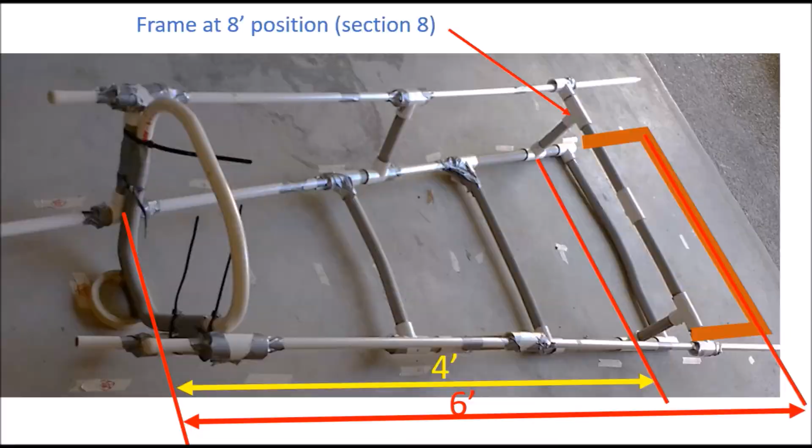Let's take a look at how to make this section. Assume that this will be gone, this will be gone, and the main piece is just this one, all the way here, which is roughly about from here to here, about 4 feet. And then the tail section, another 2 feet. Right at 8 feet, from here to here is 9.5 inches, and then there's 1.5 inch.

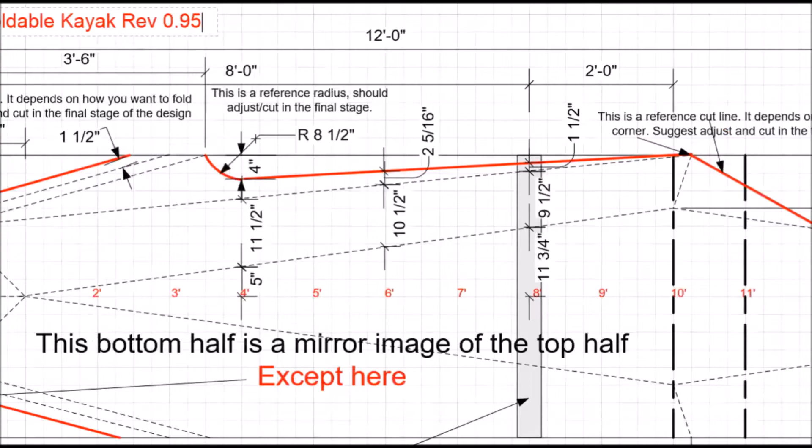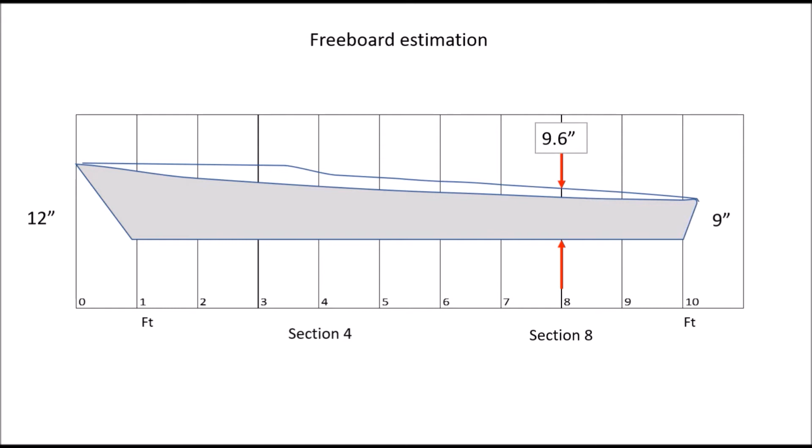Let's jump back and look at this one. Assume that this is the bottom of the boat. If I do a 9.5, I draw an arc, and then I do 1.5 here. This is what the intersection is. It will give me 9.6 inch freeboard. This is why I'm trying to get to 9.6. This is 9.6, and then this is 9.6 freeboard. In order to maintain that, I can overlay the PVC tubing around here to create this frame at section 8.

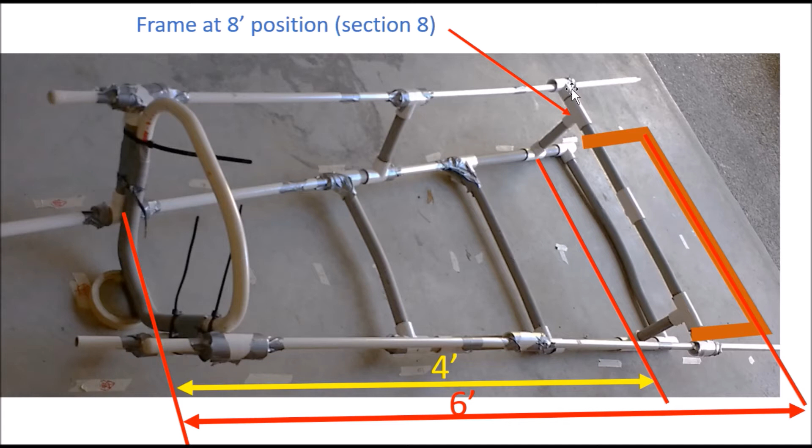I would suggest using this one, and the one I've shown here is the one I got from Home Depot, which is only a T. Having this one will make things much simpler because it has all the slots I need to create a frame. The reason I create this more complicated frame is because I want to convert this particular boat into a sailboat later on. Therefore, I have added a lot of extra stuff.

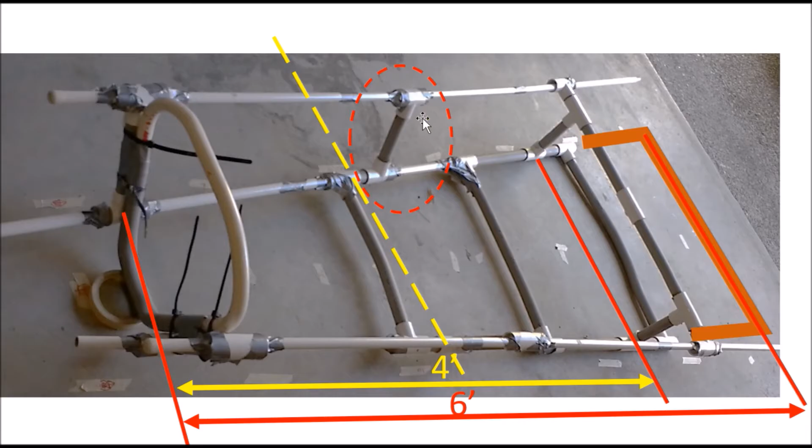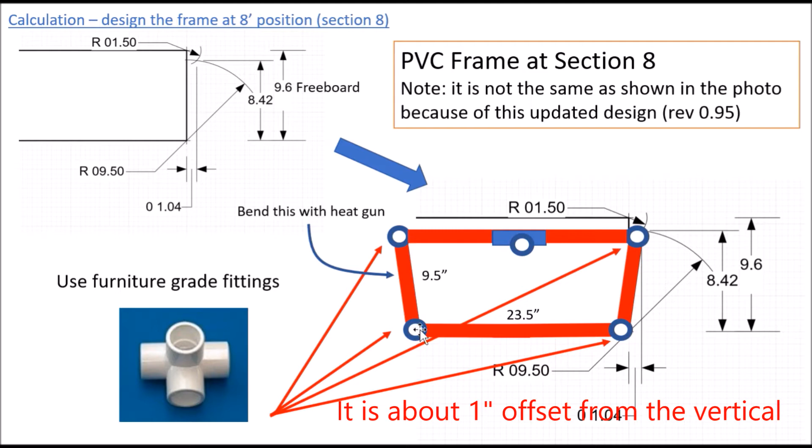With this frame, if you look at it, it's not really vertical, but coming out here, all the pipe will be vertical. So you can use a heat gun and do a minor bending to create this angle. It actually is very easy to do. This is my first initial design, and after I put things together, you can see the alignment isn't correct at this point, right here, and then here I use a heat gun, apply heat around here and bend it, and it is fairly easy to do.

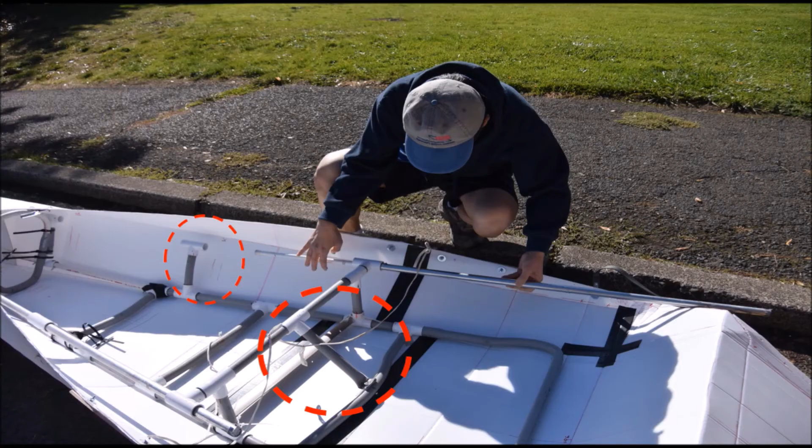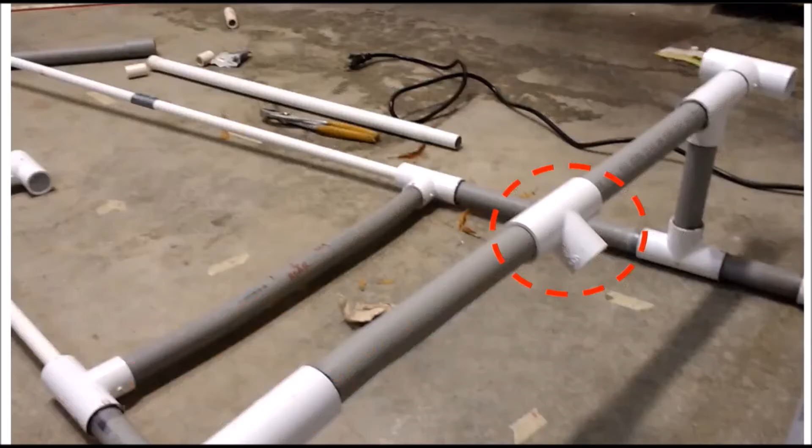If you look at here, I have another T-joint here. The reason I have another T-joint here is because I want to add another piece pushing downward to the frame. I want more support at this point, because I'm going to put the seat rest against this particular member.

And the T-joint here, I didn't glue it to the pipe because I need a little bit of freedom, allowing me to rotate it so that I can adjust this particular pipe, and I screw the other end onto the cross member here.

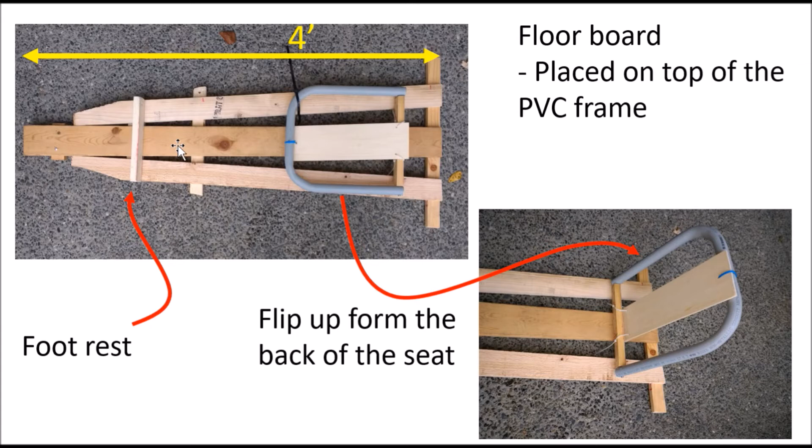I use a few pieces of wood to create this floor for the boat so I can step on it. And I also create the back of the seat, and it can collapse and fold downward, or you can push it up. And I also use another piece of wood to create a footrest. When we paddle, we can step on it and push against it with our feet.

This is the final design of the frame. If your goal is not to support the future sailboat design, which I don't have a recipe for at this point, I would suggest you create the frame this way, and then add the floor-board design on top to provide better support to the frame.

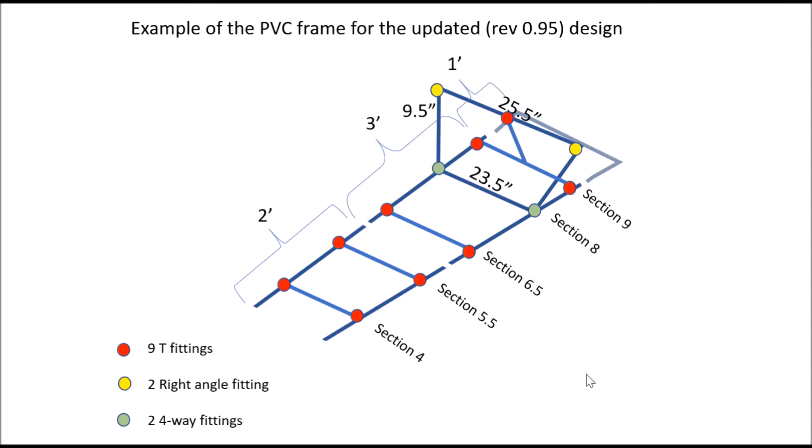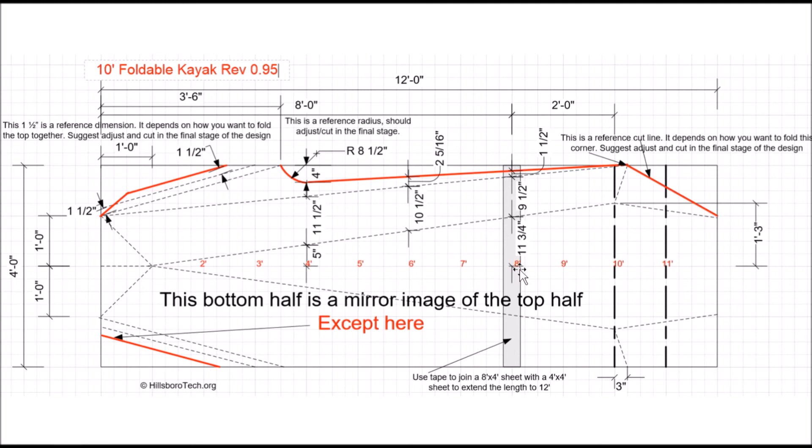I used 2 sheets of Coroplast. The first sheet is a 4x8. The other one is a 4x4. Here I use the Gorilla tape and tape both sheets together. I have 3 layers on top, 3 layers at the bottom. Because I use the tape and I don't want stress to be applied to the tape, I put a piece of wood at the edge to relieve the stress or pull between the 2 sections of the Coroplast. And you can use a shorter piece.

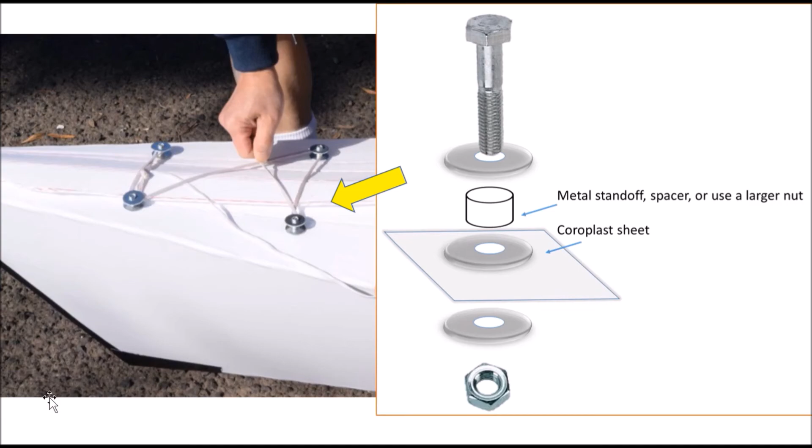And at the front of the boat, I just create some kind of a spool arrangement. As you can see how I make it, it's very simple. And it worked out very well. And I also suggest using 2 independent ropes, so that in case one breaks, you still have another one holding them together. In some designs, they use these plastic buckles with straps. Next design, I will try to do that too.

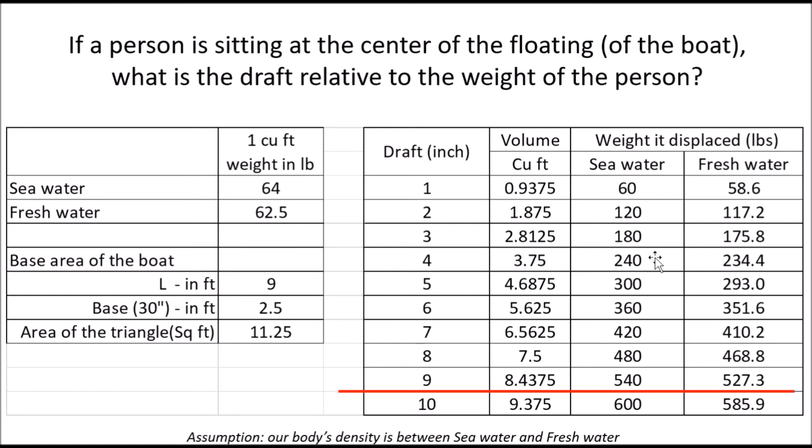How much can this boat support at the length of 10 feet? Now, assume we are sitting right at the center of the flotation at the segment between 7 and 8. If I want the draft to be 4 inches, then it can handle 240 pounds total. But when you look at my picture here, I'm probably at around 8.5 feet from the tip. Therefore, you see the draft in the front is maybe only 1 inch. At the back, you are talking about 4 or 5 inches. And my total weight on the boat together with me is probably around 170 pounds, with the paddle too.

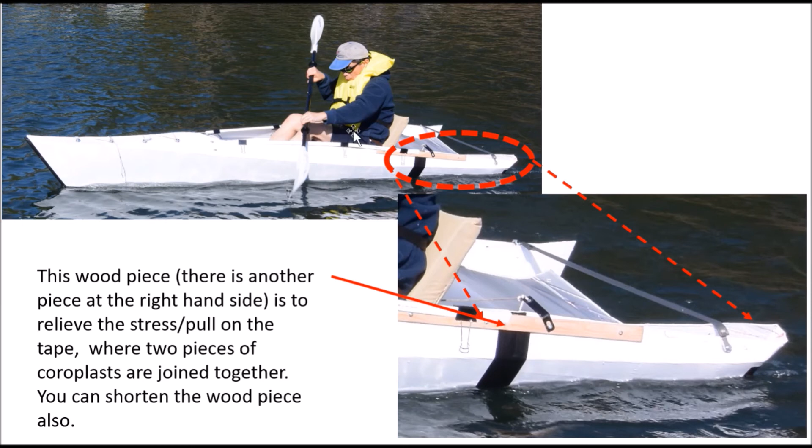I found it's very easy to create a fold line. I use the heat gun to warm up the surface, and then I just use the handle part of the wrench to create a fold line. I put a ruler there to guide me too. You have to make sure that the edge of this wrench is smooth, otherwise it will cut into the Coroplast.

In some of the drawings, you see me having these brackets here, which I put at section 4. Later on, I will use them for my sailboat to support my poles for the sail. I use a PVC pipe and a 1/2 inch PVC pipe, just heat up the front here and then insert the 1/2 inch smaller PVC pipe into the bigger one. It works out very well. There are many places online which sell furniture grade fittings. Furniture grade is supposed to be stronger than the ones we get from Home Depot, either for conduit or for irrigation piping.

During my water test, the boat was flipped over because of a very strong wake from a nearby tugboat. And the boat stayed afloat, but it was right at this level. Therefore, I suggest we put some more flotation around the boat, around the gunwale here, so that this top piece will stay above the water, and then you can get a bucket to get the water out of the boat. Another option is you can get some empty milk jugs and stuff them into this portion of the boat, or maybe put another one in the front. It should be able to create sufficient flotation to keep the opening above the water line so that you can clear the water.

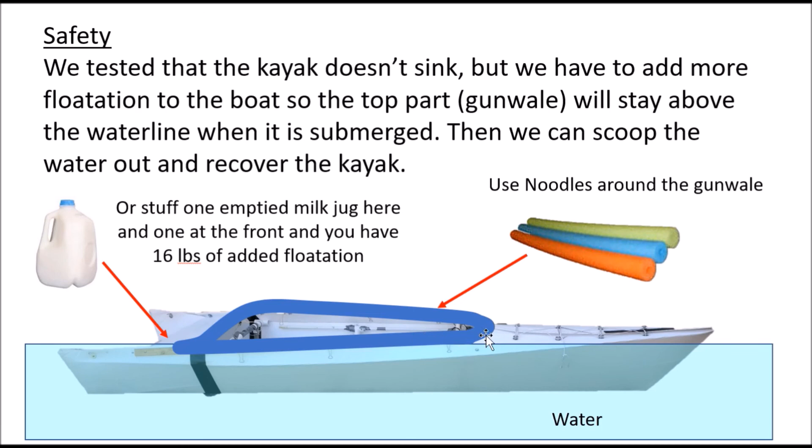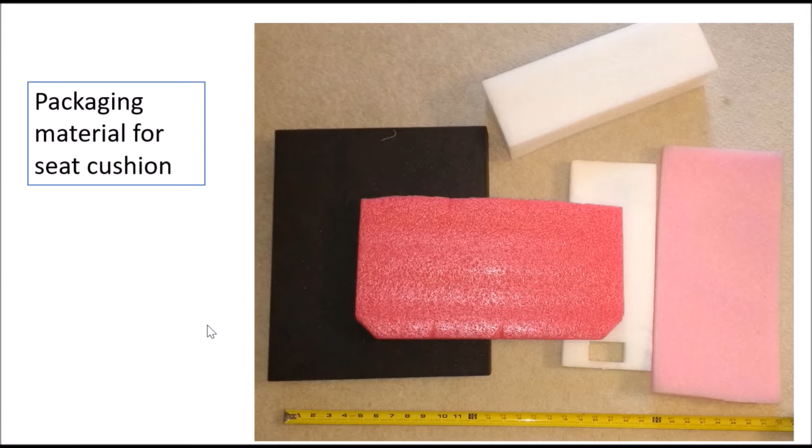Going back to the edge of the Coroplast, you can also get some kind of rubber padding, which can be inserted onto the edge of the Coroplast to protect yourself. And it looks like it's not that expensive. My goal is trying to reuse other materials I can find and not spend the money.

In this case, for the seat, I used leftover packaging material. I put it in a shopping bag, and then I created a pocket here. So when I slide it into the frame here, it works out very well. And it was very comfortable too. Of course, you can always go and buy a seat to mount onto the boat. If you don't have foam, you can also buy the foam and make it yourself.

I tried to redesign this boat to support a sail. This is a Photoshop version of what I'm working on. This is my winter project.